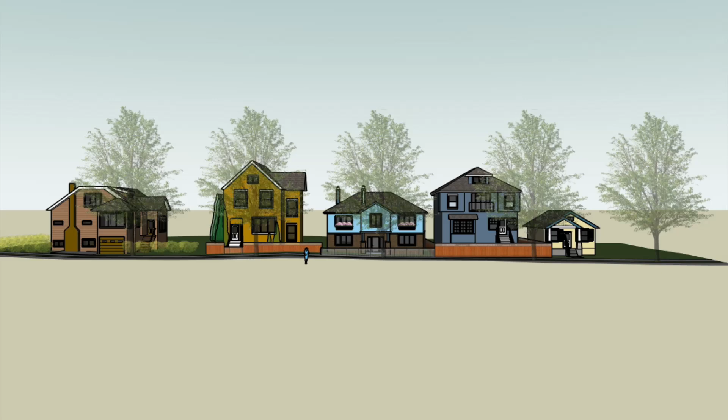Upgrading from a townhouse to a single-family home to accommodate for a new baby. They wanted a nursery that can grow with the baby. They're looking for a serene home that they can unwind in, a place for the kids to play and grow,

home office, large central kitchen for the family to gather, a large dining room, a sitting room for morning coffee, a kitchen close to the family room for entertaining, a large closet, a master bathroom, and an upstairs laundry room.

The neighborhood surrounding 433 West 14th Ave is a mix of single-family homes and duplexes situated on square and rectangular lots, each around 6,187 square feet. The area is flat with narrow streets and narrow sidewalks that create a cozy residential atmosphere. Most properties feature stairs leading to the front entrances, adding an element of charm.

West 14th employs mostly garages to keep the streets clear, typically located at the back of the properties, and many homes include basements or crawl spaces for additional storage. The road is lined with mature trees that provide shade, contributing to the area's overall character. Fences surround most of the lots, offering privacy for residents.

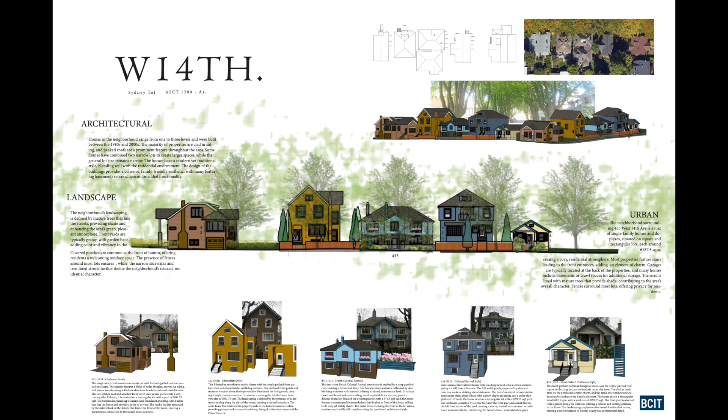For the lot analysis, the site is under RT6 zoning. The type of residence is single detached house. The gross floor area of the building is 4,640 square feet.

The front yard setbacks were 23.9 feet. Side yard setbacks were 4.97 feet, and the rear yard setback was 35.10 feet. The lot width was 49 feet. The lot depth was 125 feet, and the lot area was

6,187 feet. The building depth was 143 feet, while the average floor area was 1,546 square feet.

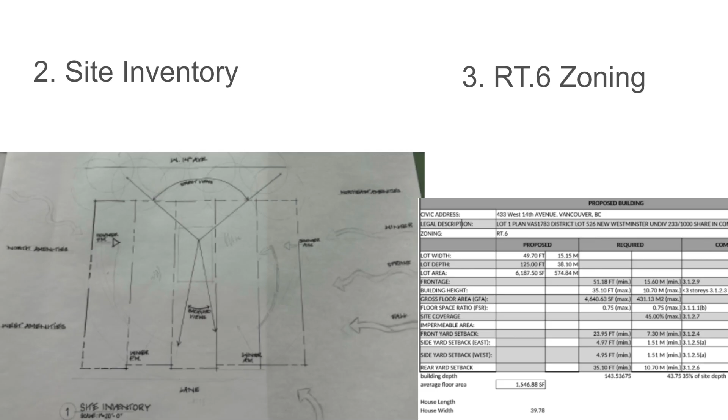There's a lot of rear space, so we created a full back porch with an outdoor kitchen, multiple sitting areas, a pool, and a garage. And the garage even has storage for bikes and tools within the garage, for neat storage and easy access to things like bikes or tools if needed.

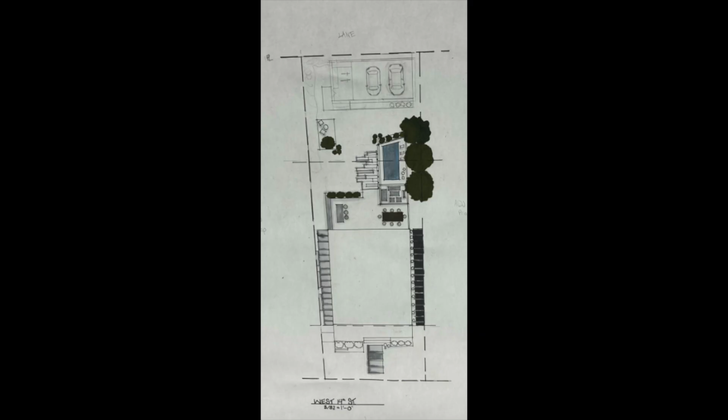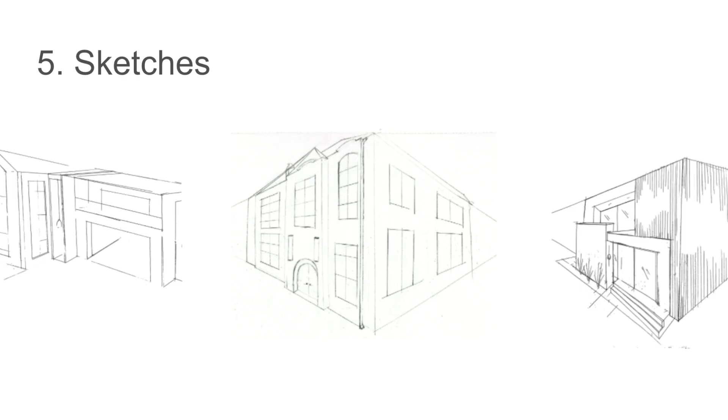For the initial sketches, I wanted to create a more modern element to the neighborhood and really elevate the neighborhood as a whole, as on the opposite side of the street, the houses there are a lot more modern. But I didn't want to push it too modern. I kind of wanted to stay in that contemporary element, so that it didn't look out of place in the neighborhood.

For the initial floor plan sketches, I really wanted to make the kitchen the center of the house, and I wanted everything to work off of that kitchen being the center of the house. It's kind of where everyone gravitates towards, the hub. So I wanted that to be very much the center of the house, and also very large and open, for entertaining, just being with family, etc.

The top left sketch really focused on that kitchen being the center. I wanted the living room to be right off the kitchen to create a nice flow. That's typically, I think, where most families spend a lot of their time, either in the kitchen or the living room. And then I wanted the dining room to work well off of the kitchen, so that there's no food spillage or anything like that. You don't have to carry food far from the kitchen for any dinner parties or anything like that.

I also wanted the mudroom to be close to the kitchen, because that's typically where the garage is. And I wanted groceries to be brought in very easily, hence the pantry being right there as well, so grocery access can be done very quickly and easily. And then to the top right, kind of a similar theme here.

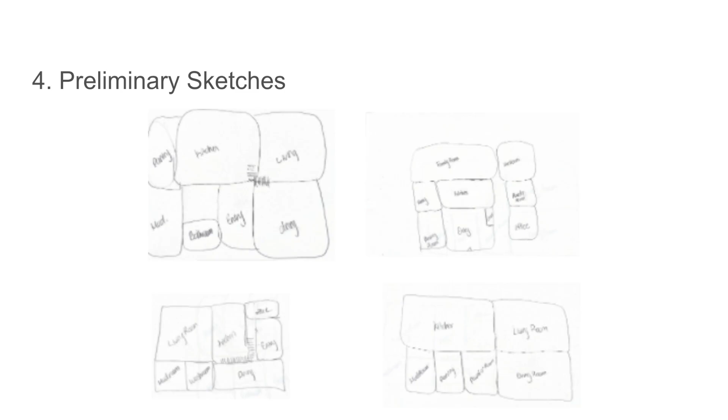And then the bottom right, same thing with the living room right off the kitchen and the dining room being diagonal to it. And then I just slotted in the three other main areas that I wanted on the main floor: the mudroom, the pantry, and the washroom.

The floor plan we landed on has a large front entrance, with the dining room just off of that, moving into the kitchen with a washroom beside it, and a living room behind that, and then the mudroom just off the back door into the pantry for nice and close grocery access, and then the office at the front of the house so that you can see if anyone's at the door, or be able to get to the front door very quickly.

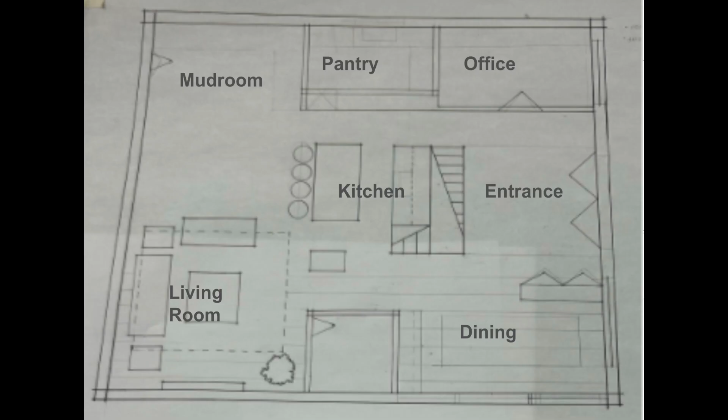So I did end up changing this floor plan slightly. We still have the large grand entrance that's floor to ceiling, leading into the dining room, but we moved the bathroom to the front of the house and added a sitting room with a patio for lighting so that everyone can have coffee in the morning just off the kitchen. The stairs also lead into the kitchen, and the living room is still off the kitchen as well.

We changed the orientation of the island to be longitudinal, vertical, and kept the mudroom by the back door and added a bunch of storage area there. The pantry is still off the kitchen, and the office is still at the front of the house.

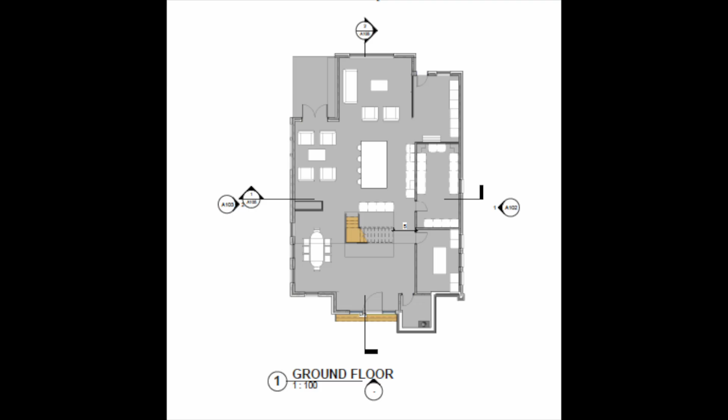Upstairs we were able to fit 3 bedrooms, or 2 with a master, a washroom, a laundry room, and a full bathroom just off the master, and a large closet as well, with a little sitting room at the top of the stairs. The entrance and part of the dining room is floor to ceiling, and the living room is also floor to ceiling.

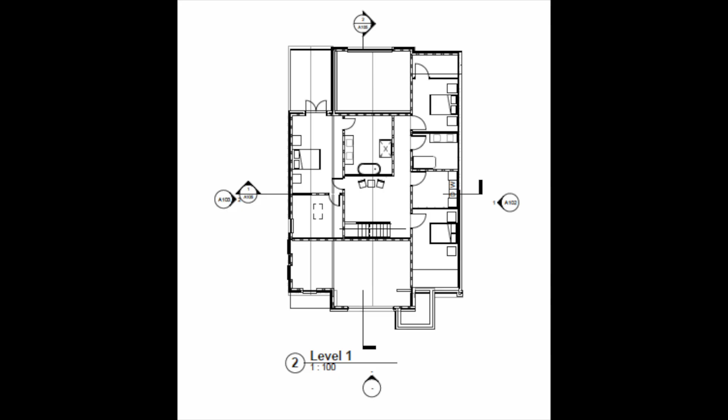So this is the south end of the house. It's actually the front, but we went with high peaked roofs, and so we did a lot of mix of materials. So there's brick on the left side peaked section with a large floor to ceiling window. The front of the house has a large floor to ceiling window with a glass door built in, and the material on that front is stucco with stairs leading to the front door.

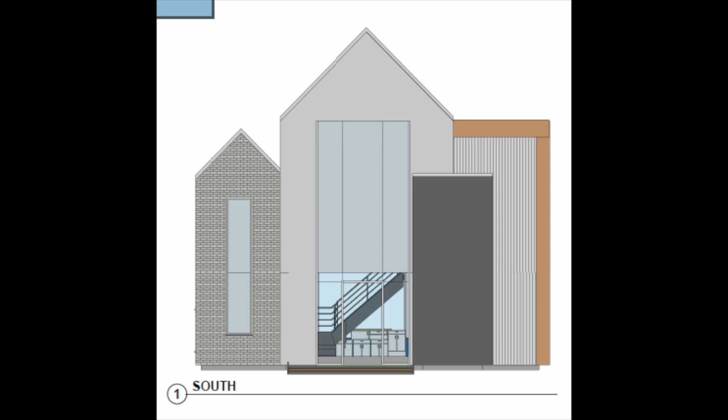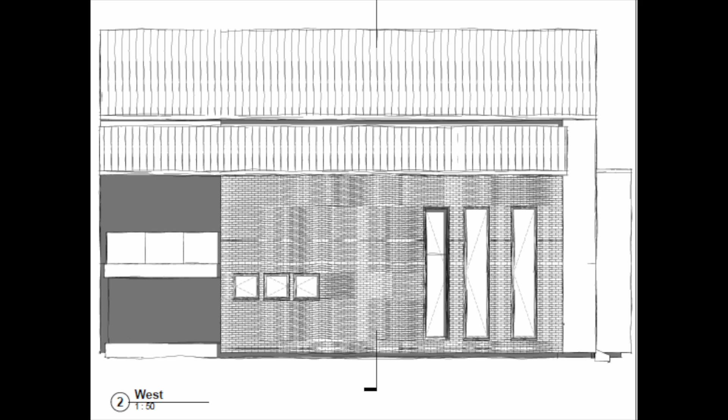The brick doesn't really show up super well in this photo, but you can see the side view of the patio just off the master and the sitting room. The east section has less going on, as it's supposed to look like a cohesive concrete block, essentially. There's a couple of windows in the pantry and the office just to allow for natural light to come in, which is super important as well.